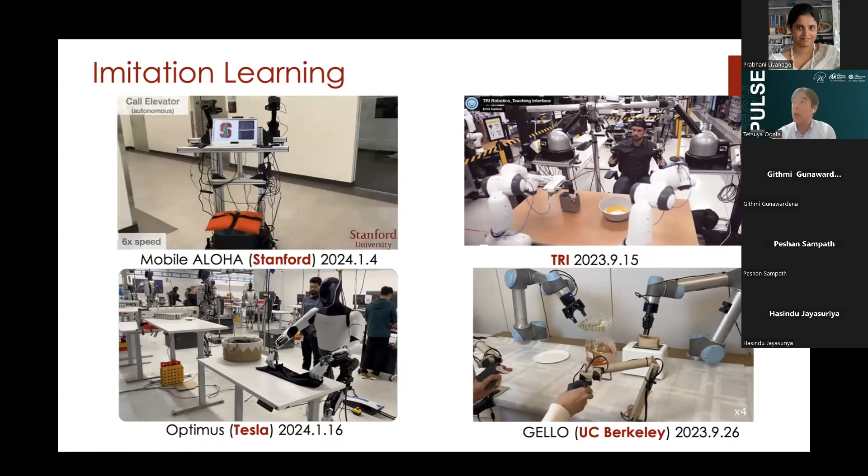Here they use some technology where humans control the robot. By showing such kinds of demonstrations by human operators, the robots are now trained so as to imitate such kinds of motions. And that is one approach.

Considering this, what's interesting now is many big tech companies focus on human-like robot systems, like Tesla Optimus or ALOHA. ALOHA also has two arms, and OpenAI also works on Figure 1 or 1X. They also use and develop humanoid robots. So humanoid robots—because they now try to teach the robot through human demonstration, it might be better for the robot to have a similar shape to humans, so it becomes easier for the operator to teach them different types of tasks.

Considering the history of robotics, going back to this slide, we have the longest history of developing humanoid robots. Waseda University developed the first humanoid robot here, named Waseda Robot, Wabot 1, 50 years ago. My supervisor, Professor Ichiro Kato, started this project, along with his successors.

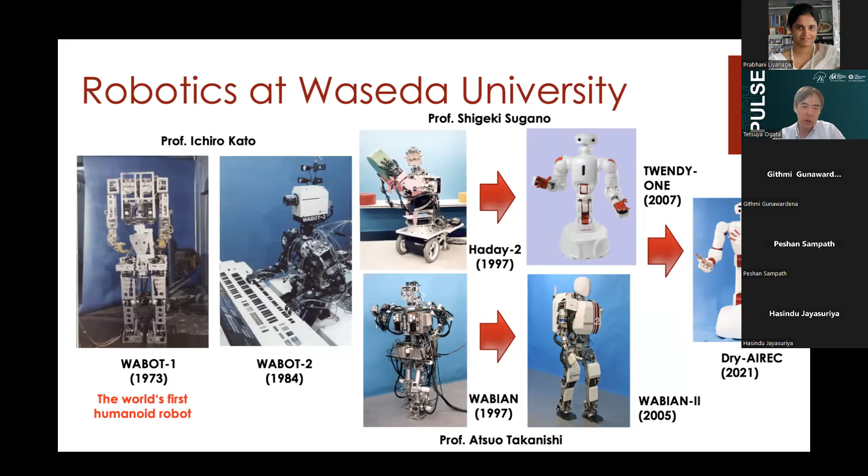I believe that our history supports combining the mechanical engineering field and the AI field. So again, regarding deep learning—deep learning shows very good performance, especially in image handling, sound, and natural language processing.

But at the same time, when we focus on robotics, it's still not so easy to use deep learning for real hardware device applications like robot systems. This is often referred to as Moravec's paradox.

This means some tasks a human adult can do, like playing games, logical thinking, or medical suggestions, are actually easier for AI than some very primitive tasks like walking, watching, or handling objects with fingers or an arm. These latter tasks are usually ones human children can do, but physically interacting with the real world is very open-ended and very hard for robots.

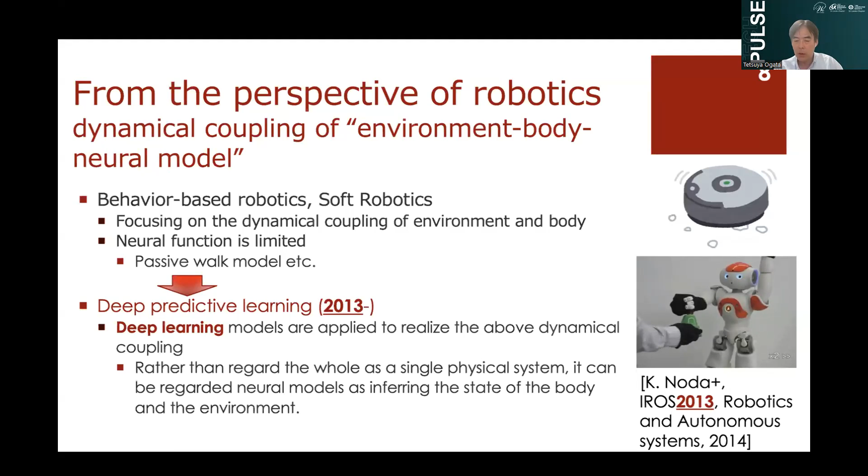And this idea is very related to a latest concept called active inference — inferring actively. So then some experience, some kind of multimodal data, is given not passively but actively, by generating motion, multimodal experience can be obtained.

This kind of idea is now being seen — last year I had a keynote at the international workshop on active inference. But here, attendees came from many different fields, just not from robotics. That is very interesting.

And it changes the posterior beliefs, by changing the cognitive states and also the weights of the model through learning. And this also includes changing its own actions. This concept is very important.

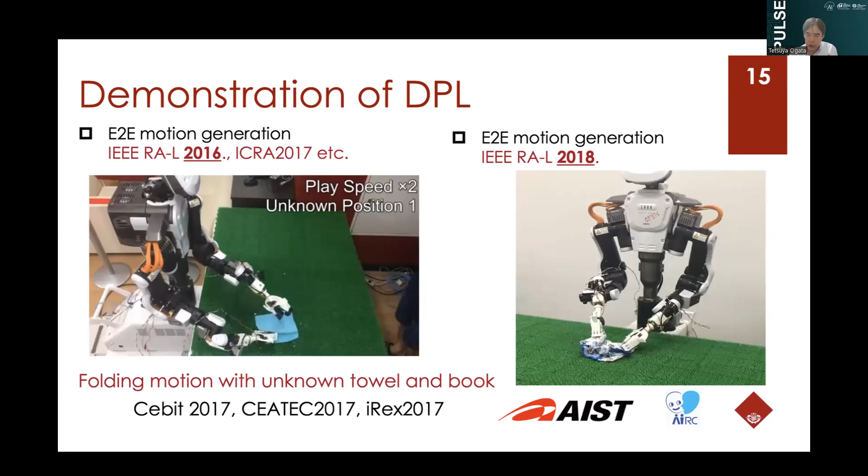And here is an advanced version we can apply. Sometimes, of course, the model itself becomes a little bit complex, but basically with the same policy, we can enable the robot to handle this kind of small cloths.

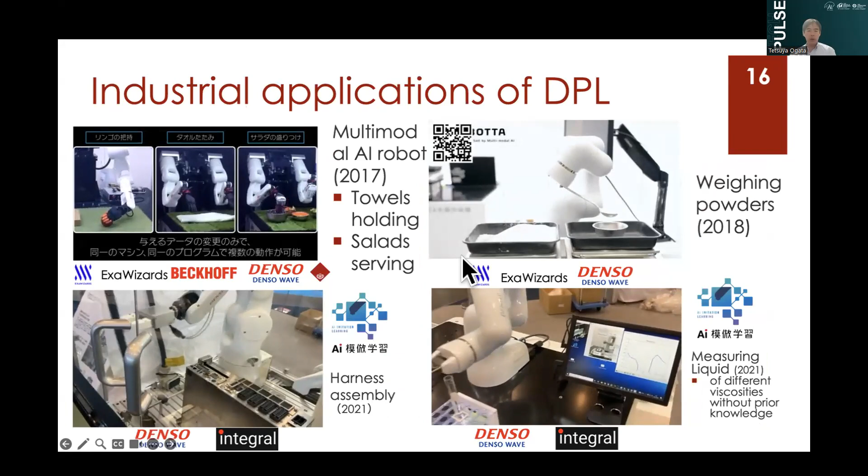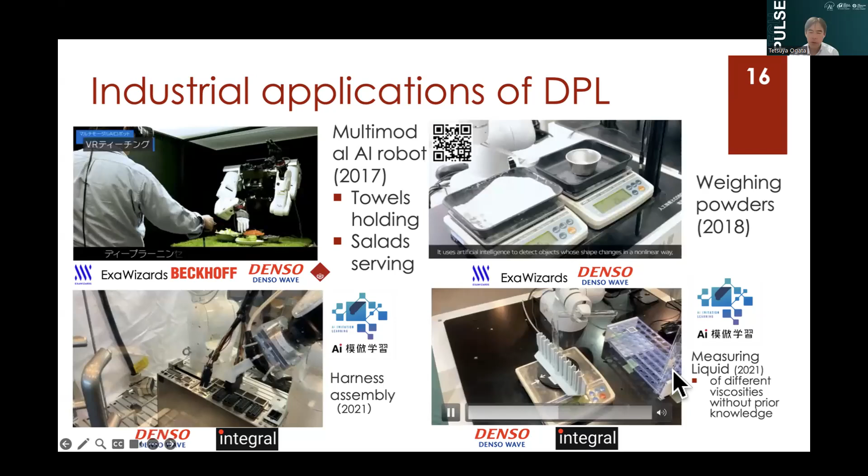And then we showed these demonstrations in multiple exhibitions in Japan, and also sometimes in Germany. Some of the companies showed interest in our technologies. We exhibited these robot demonstrations in multiple exhibitions. Also, some of them, you can see here is a logo of the products of a Japanese company. So some of the technology has already been released to some industrial lines.

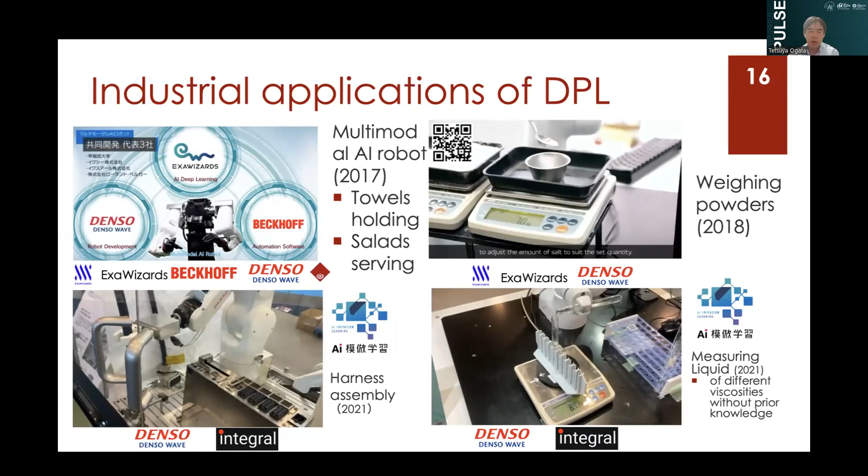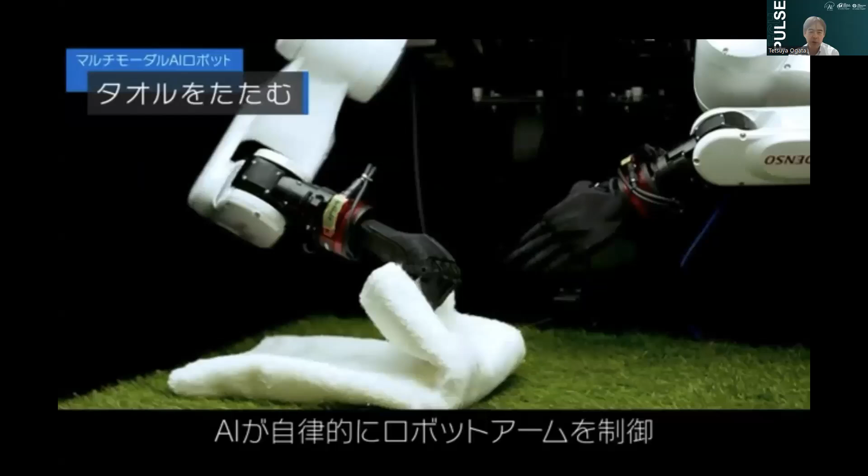And especially there's interest in this story, which is written in Japanese, but it's about a multimodal AI robot. This is a very fast prototype, showing collaboration with Japanese companies. So they first replicated our first work on holding towels, but in a more complex way.

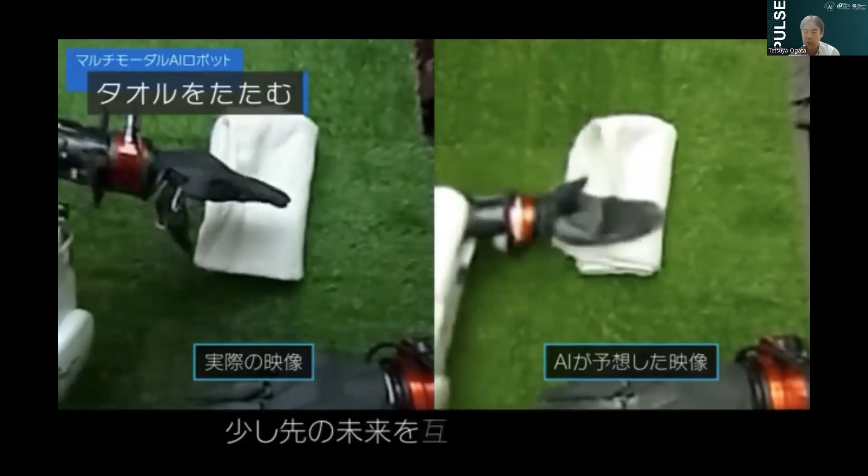This is now generated. So here is a real image, and this is a predicted image. You can see it shows almost the same performance as recent generative AI. So it's always keeping the generated image in real time.

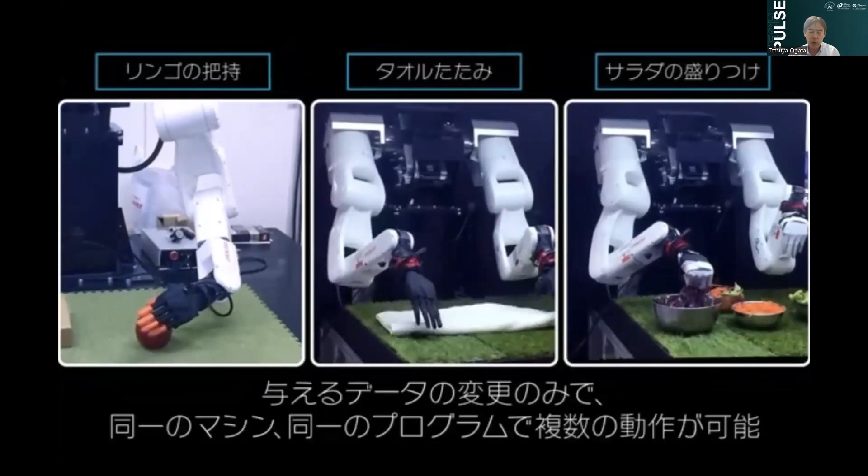And so without any procedural programs, any programs, a robot can adapt to changes in the condition of the target object, automatically adapt, and continue the work. And just by changing the training data, the same robot can work on a different type of task.

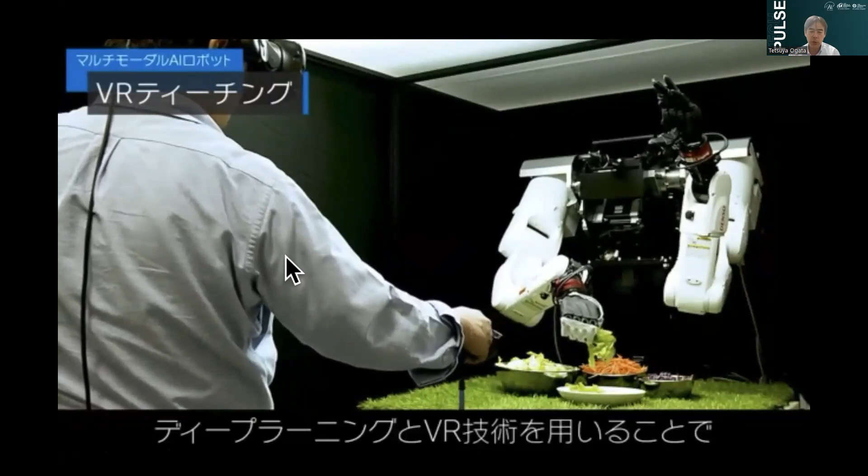Here is picking the salad. For teaching the ways, we use virtual reality models. Now he shows a demonstration to the robot, then the robot can recognize an object or something.

And one of the important topics here is that now the robot has torque sensors in the wrist. So the target of the prediction is not only the image, it's also trying to predict the torque of the wrist.

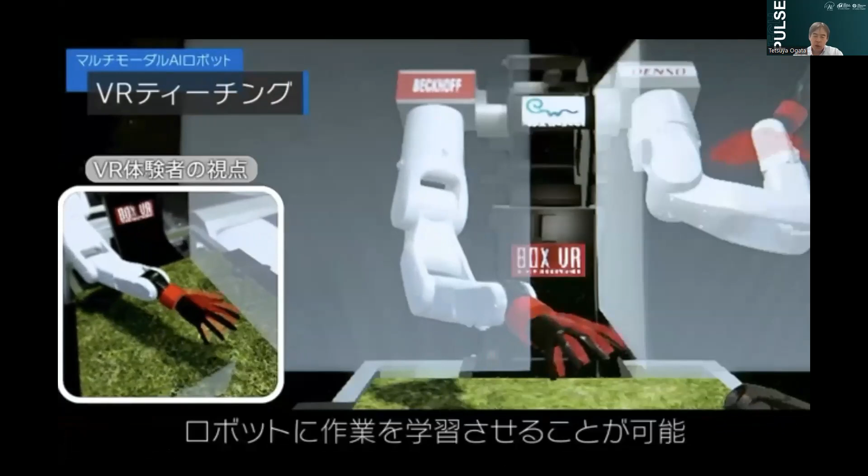It's very helpful, especially for picking salad, because from the robot camera there often happens occlusion. So the robot cannot recognize if the salad is really grabbed or not.

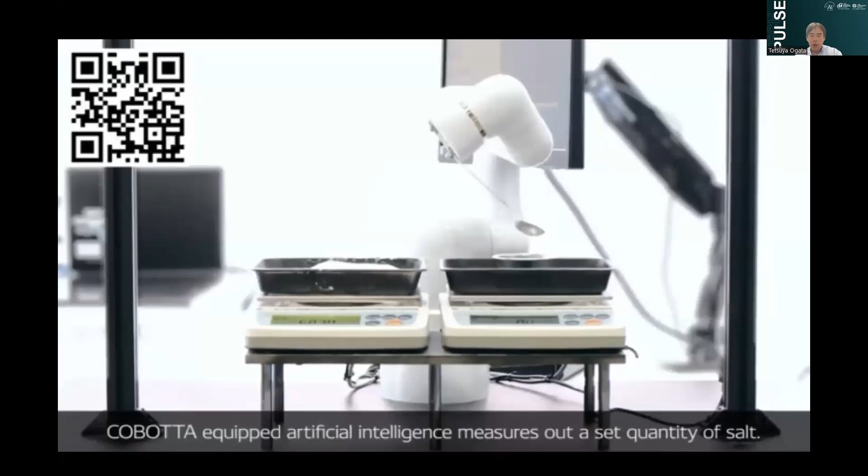By combining the image and the torque of each joint, it can measure the powder very precisely. This motion is also demonstrated by humans.

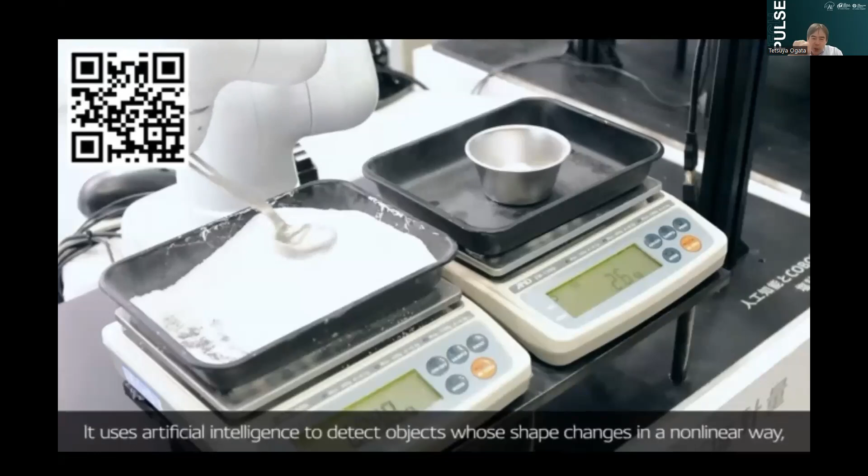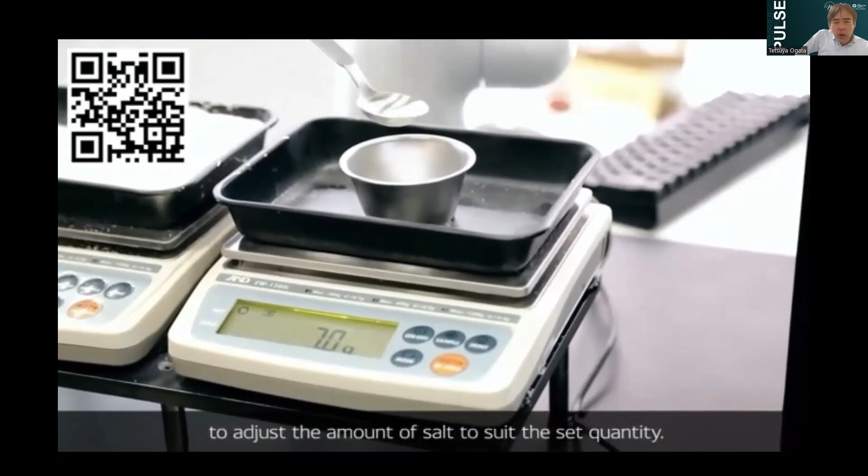It can show small motions to control the weight of the powders. So here's why this becomes an application - considering the development process of medicine or cosmetics, some of this kind of medicine powder is very expensive and sometimes very dangerous.

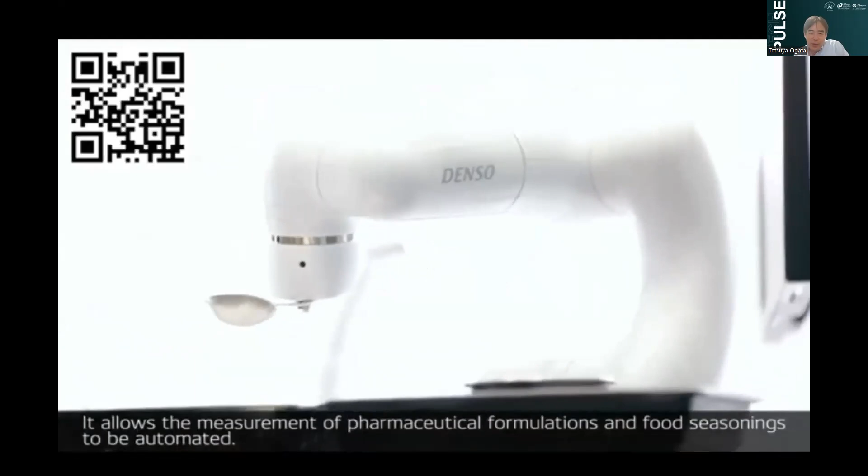Humans usually operate this kind of work, but it can become toxic, so it's not a safe task. So now many industrial companies use a robot for such a development line.

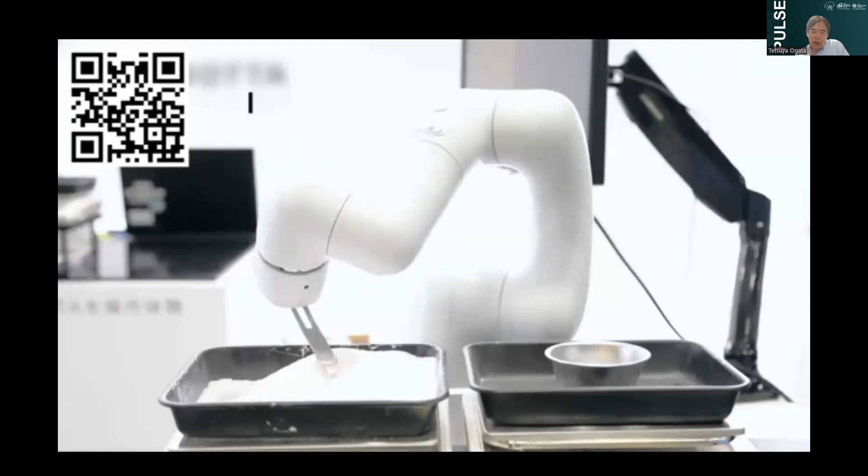The same thing applies to measuring liquid - it's also used for such kinds of medicine or cosmetic industrial experiments. Some company staff tried to test the ability of our robot.

It was just trained on two different types of liquid, but they confirmed whether it could really measure other types of material, like beads, rice, or pancake mix. So firstly, to shake it.

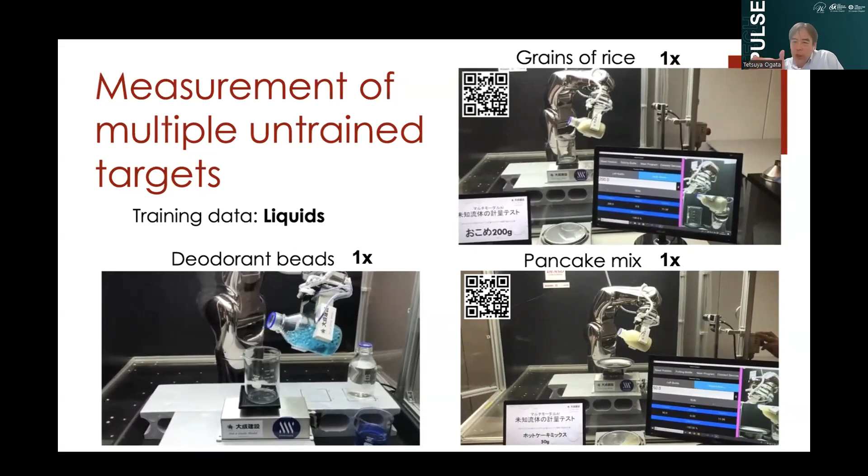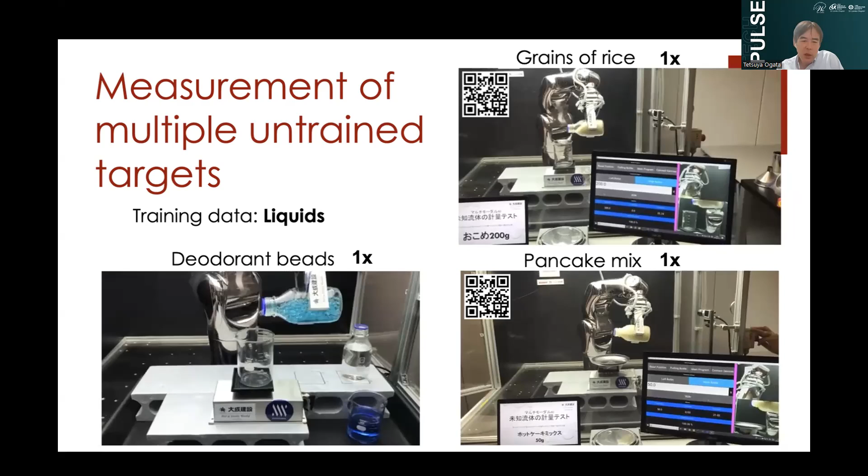By capturing the image during the shaking, it also helps to recognize the size of the amount of liquid, and also viscosity could be estimated.

And here, which one is the first three? Did I forget?

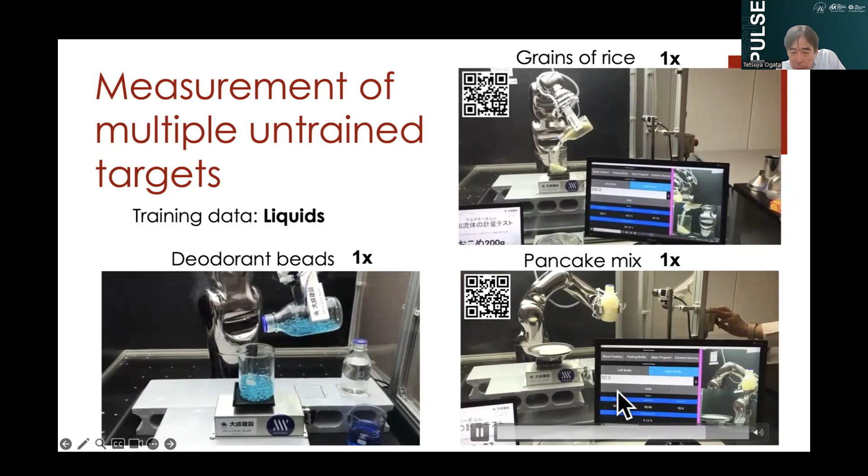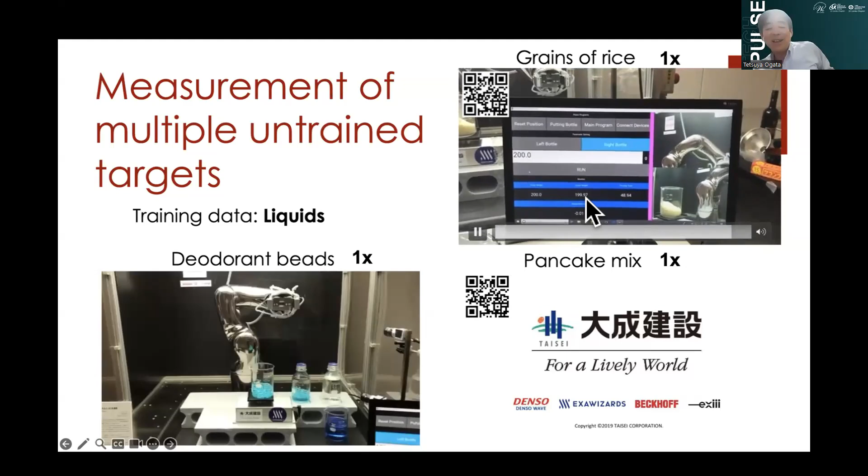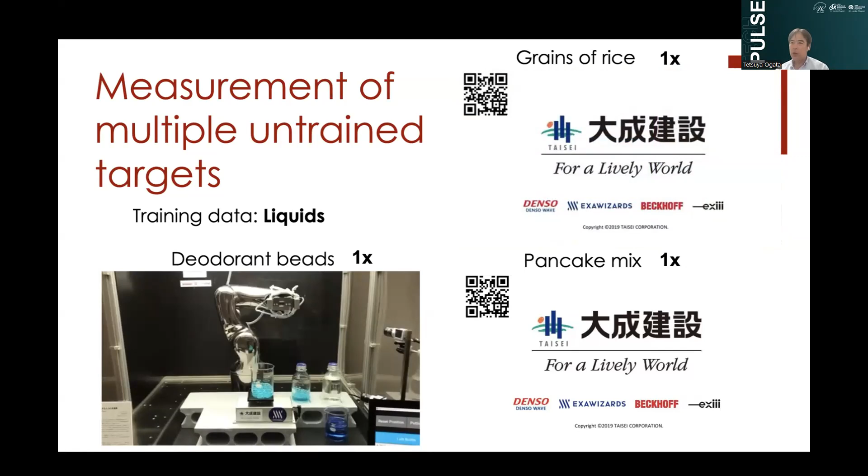This kind of work is done using only deep learning. All control, so joint control, is generated directly from the sensor input. That is very important. And this was already released as another product by Denso Wave three years ago.

I'd like to show, from now, not the detail of the technology, but some applications. Here is work also on measuring or pouring these kinds of materials and ingredients. It won the Best Paper Award in Cognitive Robotics at ICRA.

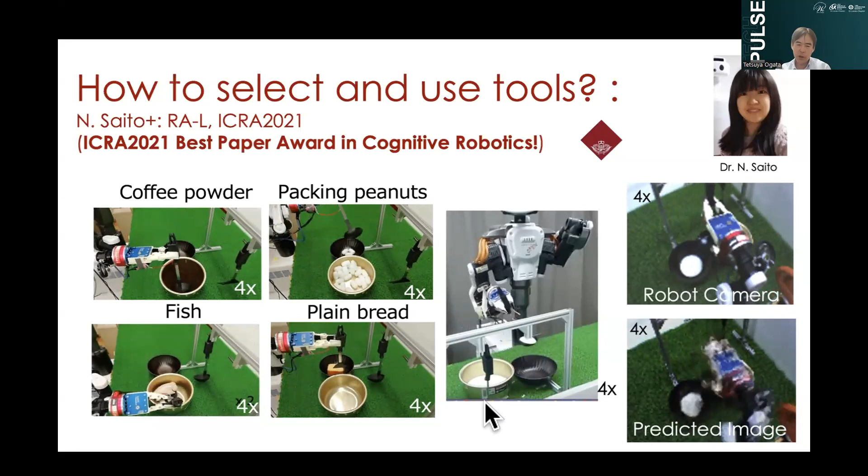The architecture is very similar - it inputs the image, and it also includes the motor angle and the torque sensor, force sensor implemented in the hand. This also becomes the target of the prediction.

So the network is trained to predict the future image. As you see, it's a very similar architecture to the recent latest generative AI idea, but we proposed this framework much before generative AI.

The robot network is trained using this object, and we tested it on this kind of untrained object here.

After training, we can analyze the latent space of the neural networks. It's not always promised that we can find this kind of representation in the neural networks, but in this case we successfully found some very interesting representation.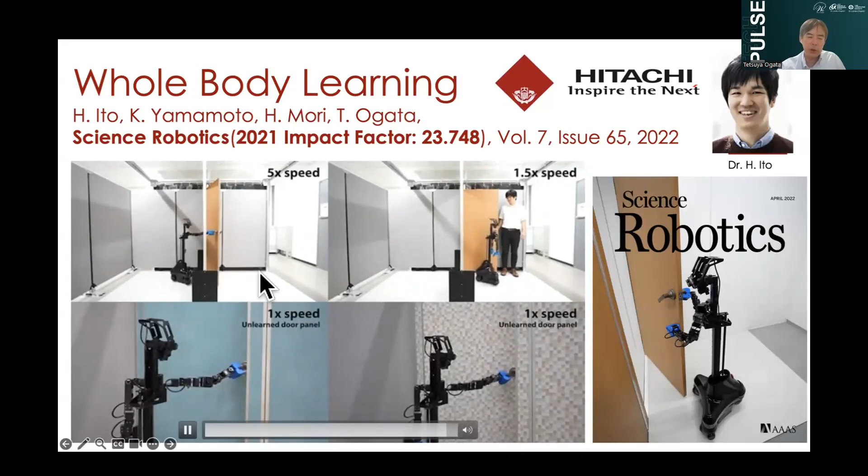So this is using the manner of the mixture of experts. So multiple predictors in parallel try to predict the future conditions, and one of them handles the whole body controls, something like this.

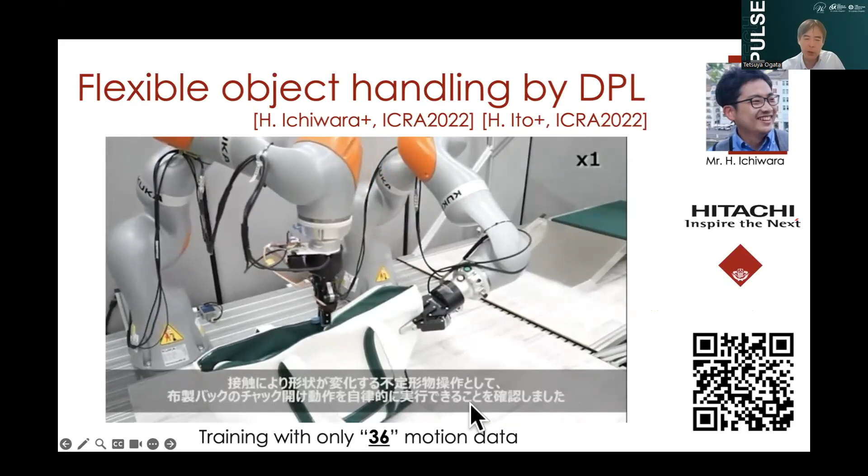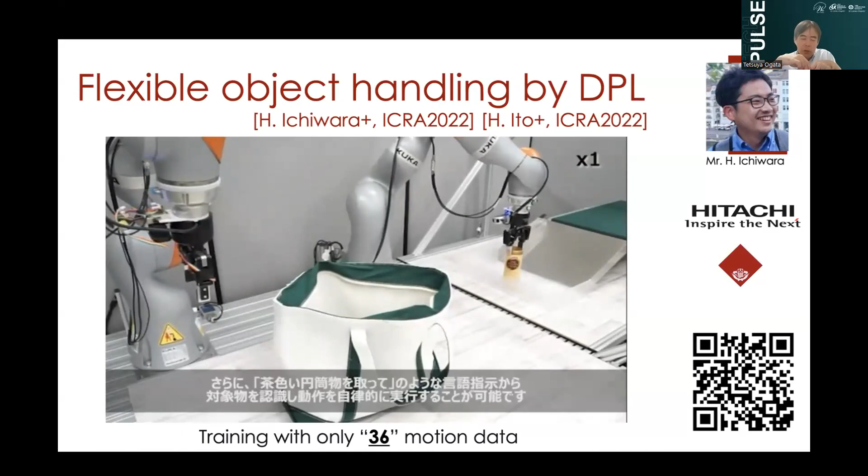The other example I'd like to show is opening a zipper. Opening a zipper seems easy, especially for human children, but for a robot system it's not so easy. I believe completely automatic zipper opening is still a very hard problem for conventional robot systems, because it requires not just adapting to force, but changing the trajectory according to conditions. Especially in this case, we started opening the zipper from picking the zipper part, which means the gripper's grasping condition always changes, so the robot needs to adjust to that kind of change.

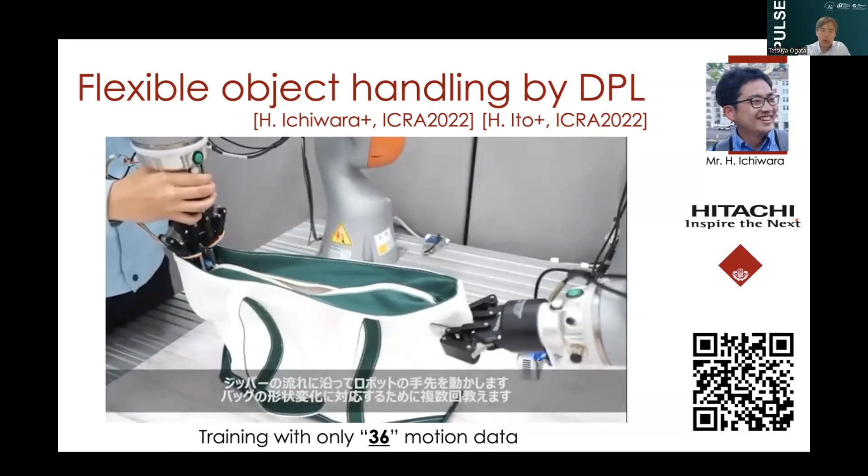The teaching is done like this. Here we used only 36 motion data examples. Then it can open the zipper even on different types of bag.

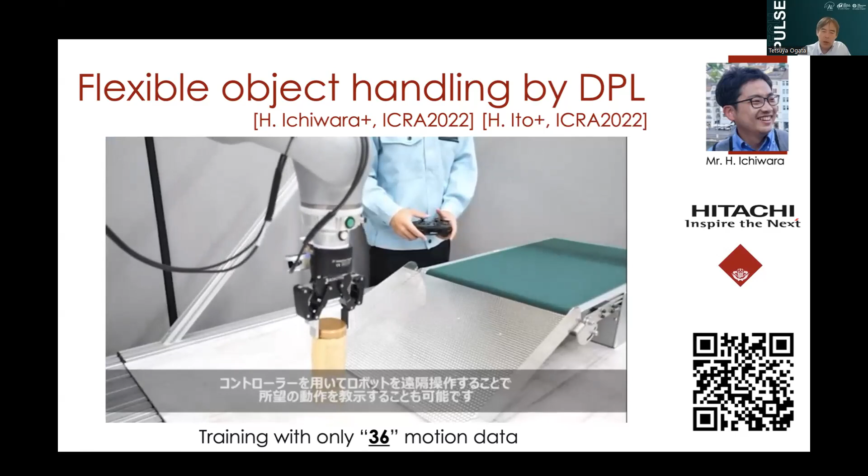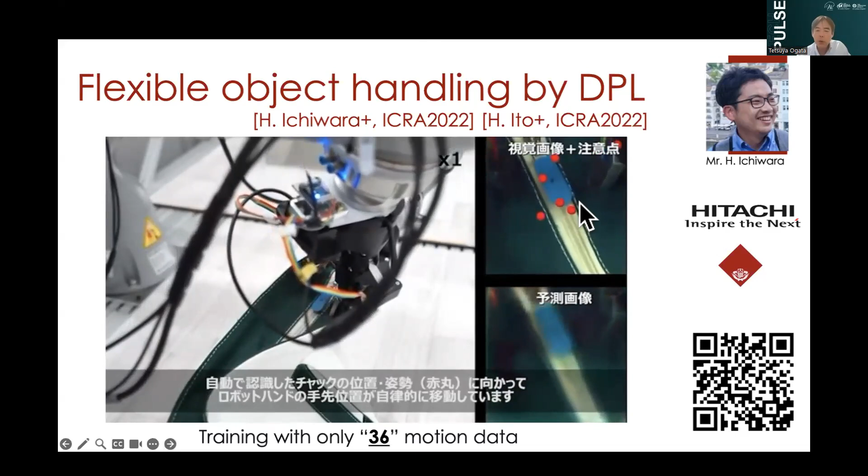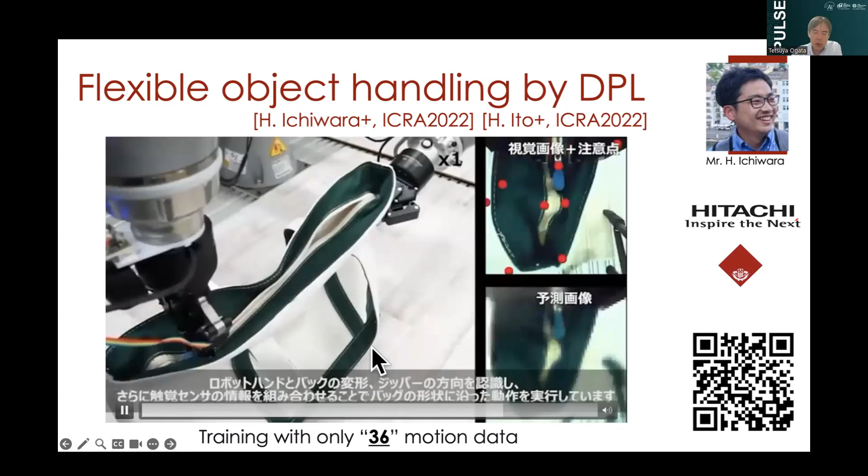We added here a new mechanism of attention. During the prediction of the future, we added networks to ignore the unimportant parts. So we placed restrictions on the predictable version, giving the networks a constraint. They need to select which part can be predicted to reduce the whole image prediction error. Here you can see this red point is automatically trained, automatically emerging as a result of the training.

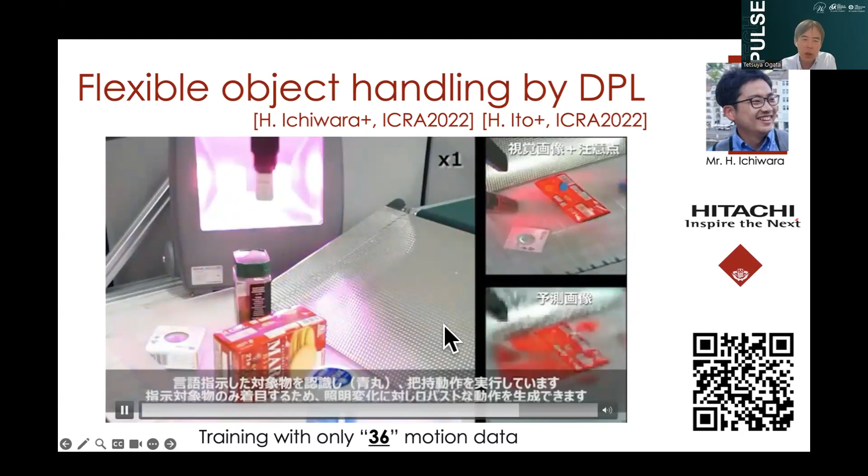Thanks to these functions, we can easily change the background color and environment conditions. We can add many objects, different objects, and change the color condition or lighting condition, but it easily adapts to such changes of the environment.

Here you can see, I like this scenario. It shows the robot can adapt to changes of position, but here I'd like to point out the attention. We give the target object using language, and the robot recognizes this one. In the predicted image, only the target object is predicted, and the other object is completely ignored. That is very important.

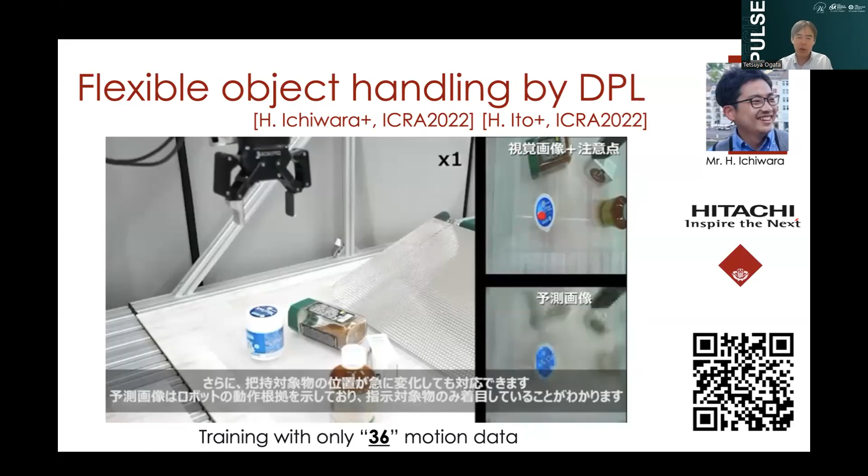So predicting the future image perfectly is not needed. Also, if the robot tries to recognize everything, many things, that becomes a worse effect on completing the task. We can focus, meaning we can ignore the others. That's very important, maybe more than the lack of sensors, in the latest deep learning models. For conducting tasks in the real world, this kind of attention is very, very important.

Again, here the target is predicted for the cognitive state, including the image and tactile senses and motion actions. But here we have restrictions on the predictors, so the predictor has to select which part is important to reduce the whole image error, the whole prediction. That means attention goes to the moving parts, and it also needs to relate them to the actions. There are many parts that dynamically change, but some of them cannot be predicted perfectly, while others can be predicted because they're influenced by the robot's own actions.

As a result, the attention point is mainly focused on the dynamic changes caused by its own motions. That is a very important sense.

Here is another example from our technology published two years ago. The robot was trained to pick an object a little bit far, beyond its arm range. After training, in this untrained condition, the robot recognizes it and removes something like this. Here is very important, that is an attentional point, then it comes from like this.

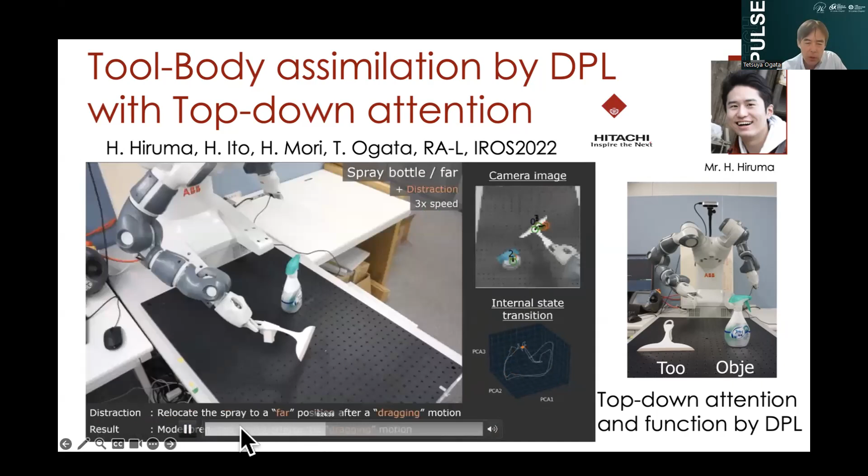I would like to talk about how the attention changes. Firstly, the robot seems to recognize three objects: one is the target object, one is a tool, and one is its own hand. This is just an attentional point that originally doesn't have any meaning. These names are labeled by us, but originally they don't have any meaning.

But the attentional point named 'one' is basically located here. Once it picks the tool, you can see that point one, the gripper path, goes to the head of the object, the tool. There are many ways to interpret this phenomenon, but we can say that our body, the robot body, could be enhanced to the edge of the tool—a kind of tool-body assimilation. This is often observed in monkey brain activities, but the same phenomenon is happening here as a result of training. We don't add any program; we just give the mechanical mechanism of attention and training data, but as a result, this kind of phenomenon is automatically generated.

So this is, I prefer this one. And by adding many objects as noises, it doesn't influence much, but it can use different types of tools or something like this.

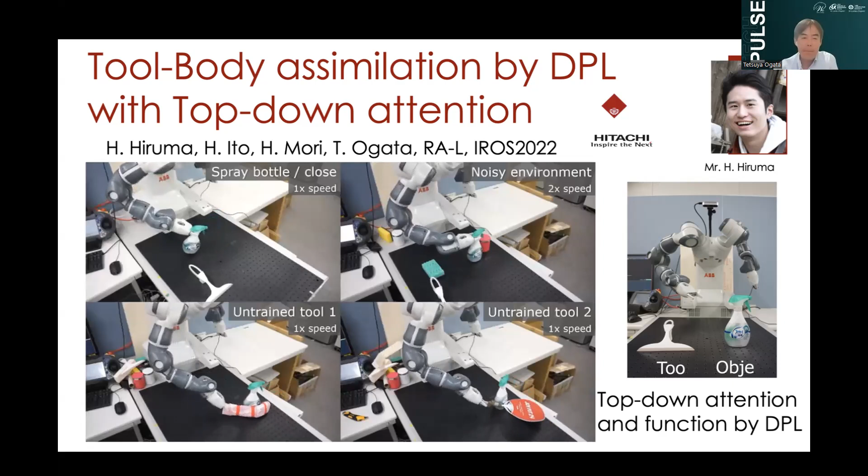So again, back to the original discussion. Many people, of course, take reinforcement learning. Reinforcement learning is, of course, a very important way. One application, especially legged robots, shows quite great performance. But at the same time, we should recognize that optimization is not always promised.

Okay, so model-free or model-based. Sometimes model-based approaches use a very similar concept called world models. The world model is trained to predict future conditions. Once it obtains a perfect world model, the policy is searched, and policy learning is conducted in such learned world models. So optimized actions are only promised under some restrictions, with optimized world models.

We think that we never reach perfect models. We always only have incomplete learning, so there's always a gap between the real world and the models. So the actual motion is always selected to reduce the prediction error. Then this kind of sense automatically generates goal-directed motion. That is our sense. That means we cannot promise that it obtains a perfect model or optimized motion.

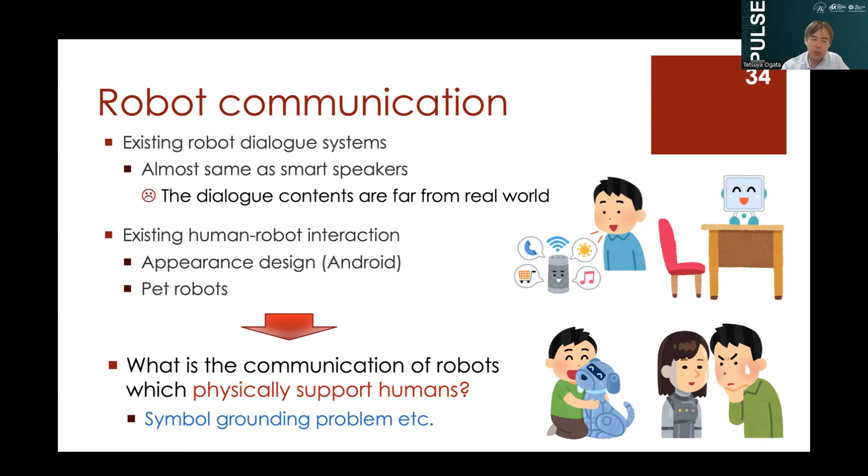So the other target is language. Large language models, of course, show very big performance, I know, but I'd like to say something about that. GPT-4 or something like this: if it's just conversation, this kind of application, large language models now become almost perfect models. But if we think about using that model for real-world applications, we need to think about some problems, like the symbol grounding problems.

For example, this is just an example. There are a huge number of problems considering the gap between the real world and sentences and languages. One is this kind of ambiguity: one motion can be explained with many different types of sentences, like touch the one, touch the orange, touch the one in front, hand on that fruit, something like this. But on the other side, one sentence could represent many different types of motion.

And it's okay to explain it using two sentences, like close to the orange and touch it, something like this. There are many variations by combining these two aspects. By using some technology like CLIP, some of this puzzle could actually be solved, but there are still very hard problems.

Here is our old study from over 6 years ago. We introduced almost completely the same idea as CLIP here. Okay, so here are two autoencoders.

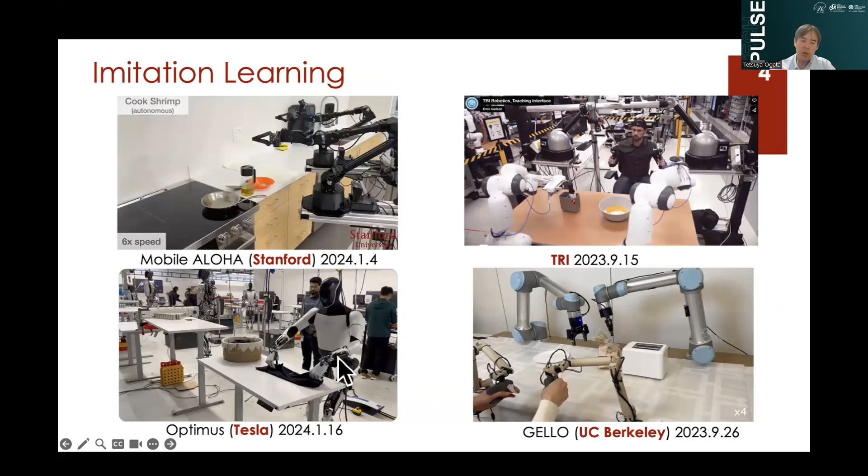Thinking about the history of humanoids, we can believe that a humanoid can do many things, even with one body. And I think from this year, as you see, there's OpenAI, Tesla, and other big techs seeming to think about the same thing. Optimus can do many tasks, and 1X Neo can work on many different tasks. So this kind of idea now becomes common sense in the world.

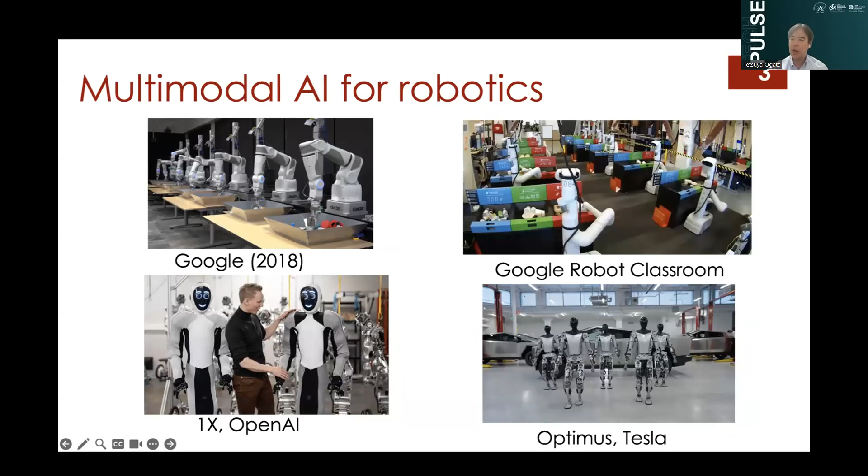Of course, it's kind of a dream, especially in Japan. We had the experience of developing Asimo 20 years ago. At that time, Asimo and other types of humanoids were developed at many different companies. But finally, almost all of them failed to make a market for the humanoid robot. So in Japan, it became very hard to propose this kind of project.

But now, from this year, the United States and China have had quite a lot of activity developing humanoid robots with AI technologies.

Here is our latest version of the humanoid robot. The name is AIREC, which comes from 'AI-driven Robot for Embrace and Care.' It's a little bit of a strange name, but anyway, we expect this robot can work in many different scenarios for supporting human daily life.

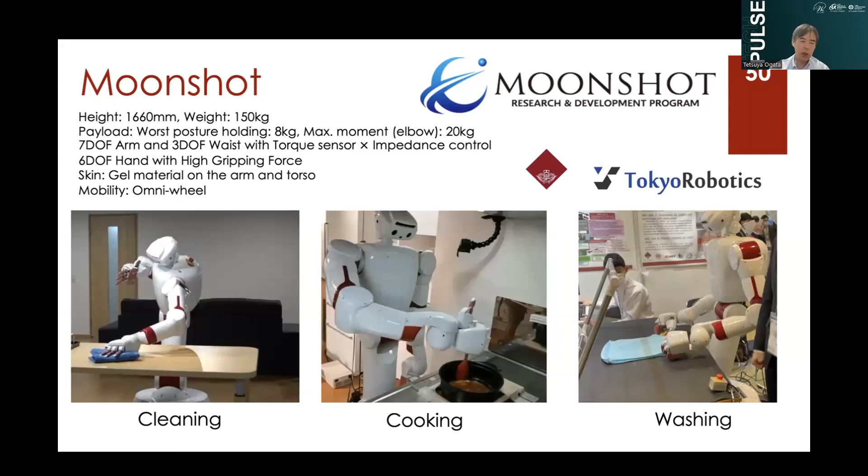It can generate big power - even using one arm, it can lift over 20 kilograms. At the same time, it has a torque sensor on all joints, so it can generate very smooth motions like this. Here we don't use any AI - we just input the impedance with the Z direction axis to keep it the same, something like this.

Here is one of our latest results on cooking. Saito-san proposed this project - she is the first author on pouring food. It won the best paper award at ICRA, and she continued the work on cooking.

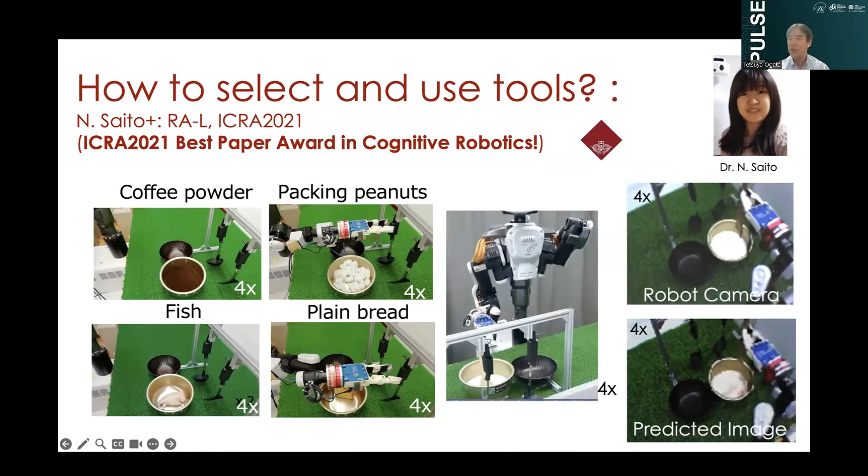For scrambled egg, at first I thought it would be easy - just moving with random motion. But if you do that, the result becomes like this. It's not so good.

So in this case, she taught the robot using direct teaching, since she cannot explain in detail what she's doing - meaning she cannot program it directly. By teaching it 32 times, the robot acquires her skills and automatically changes its motion according to the condition of the egg, which is gradually changing during heating. Then the robot needs to change its manner.

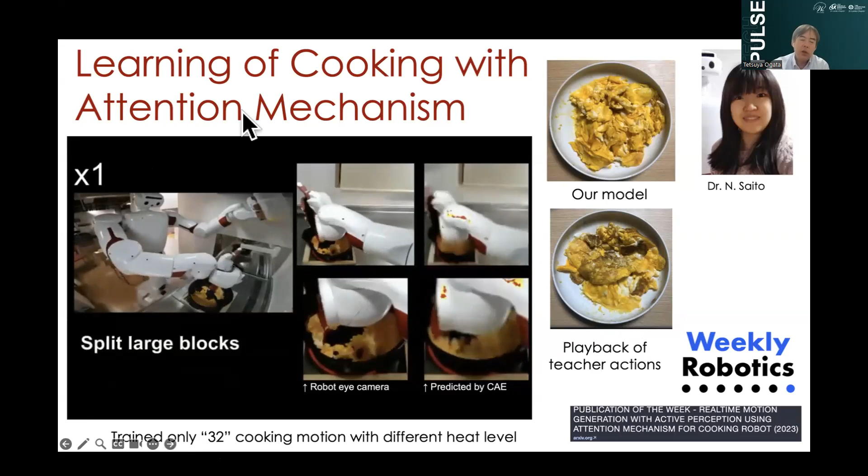We also use attention - not just for vision. This attention can select each modality. The first condition is mainly focused on vision, but during cooking, attention moves to the tactile senses. That's very interesting, and we've now submitted this paper.

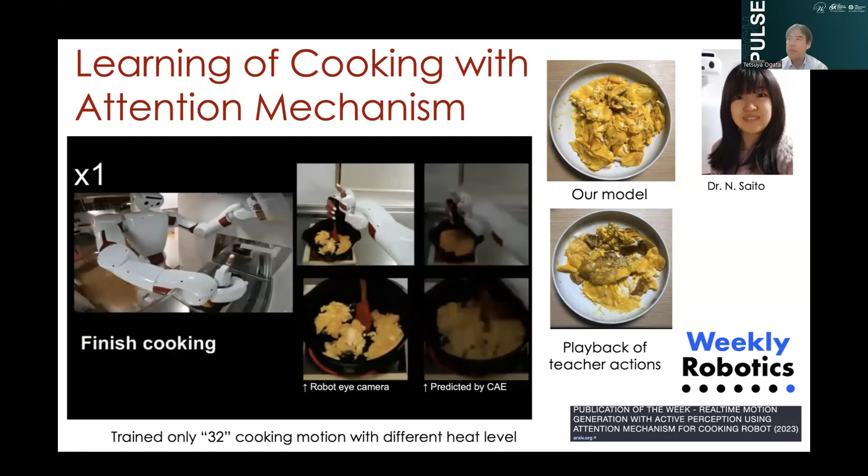So here is our open source software for deep predictive learning - we call it not deep reinforcement learning, but deep predictive learning. It's one way to apply imitation learning, with a simple attention mechanism also implemented. So you can try it - if you're interested, please capture this image now.

Here is one of the latest demonstrations of picking objects with sensors - you can see that even when changing the lighting condition or adding human hand noise, the robot can consistently continue the motions.

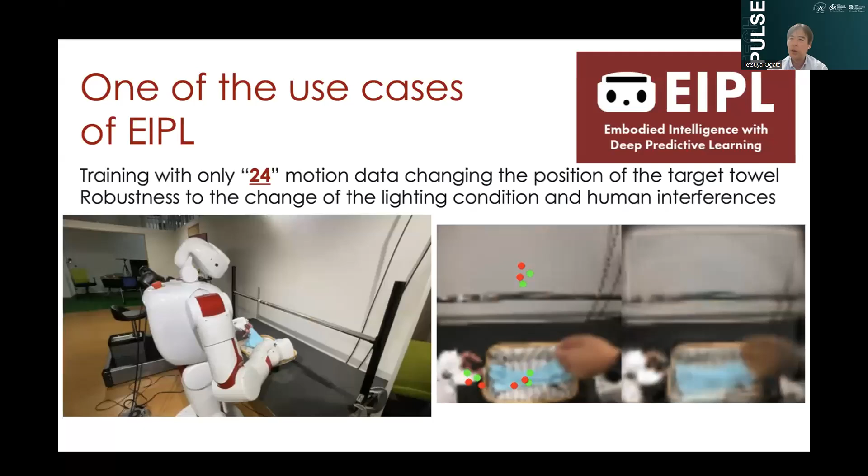And here is a demonstration from an exhibition last December at Tokyo Big Sight. Here is a minister - a former minister came to visit and we showed our demonstrations.

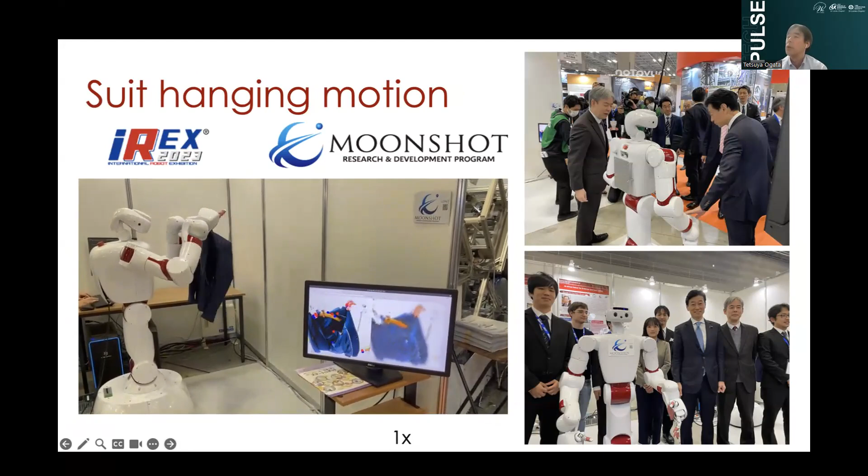So I think there are some stories about how robots and AI have co-evolved. Co-evolved means that now, interestingly, many companies have restarted developing humanoid robots. Humanoid robots were developed starting 50 years ago, and over 20 years ago there was a boom in Japan for humanoid robots, but it always failed because we could develop biped walking, arms and fingers, but there was no way to control the whole body.

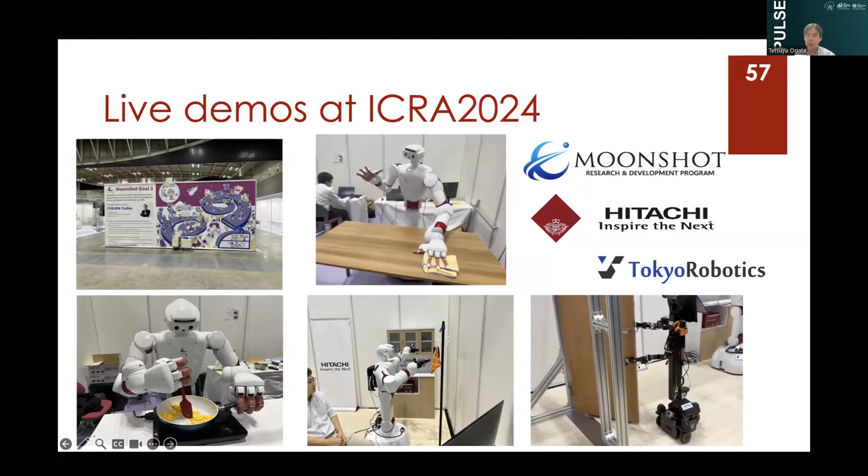Here is one demonstration: handling laundry, picking it up. Here we used only 16 demonstration data points, which is actually too small, so the demonstration itself was not so stable at this time. But basically we can see the success cases, and it was captured by many media outlets in Japan.

Interestingly, this was developed in only 2 weeks. But actually it also includes work to move to this container and pick up the dish - that's the whole story, but it takes a little bit longer, so here we just show these motions.

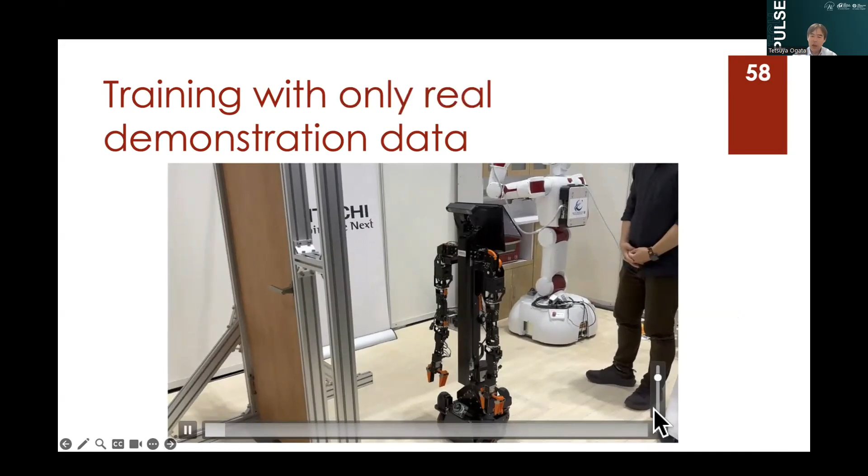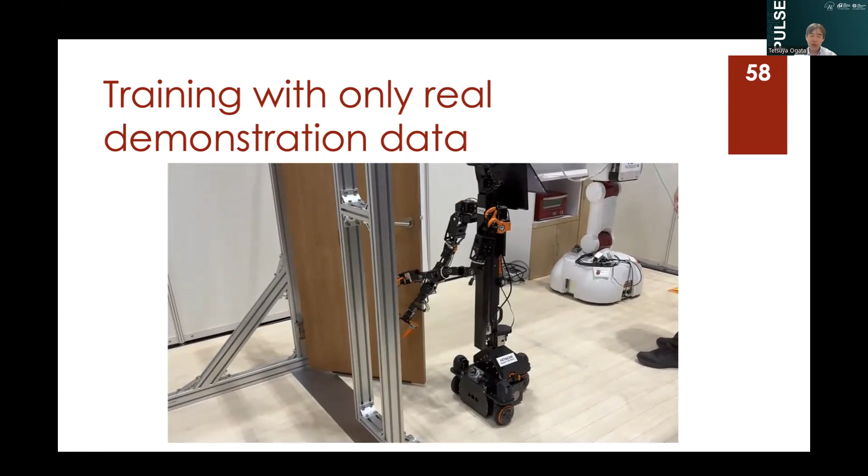And this robot is basically very expensive - very, very expensive. So now I'm collaborating with Hitachi to develop the latest version for the Moonshot project. So you see this door-opening robot - and it's not just for door opening, it can of course be used for many different types of applications. This version is much, much cheaper than the original robot, and it can be trained very easily. By the end of this month, I expect it will be released for research purposes or more general use.

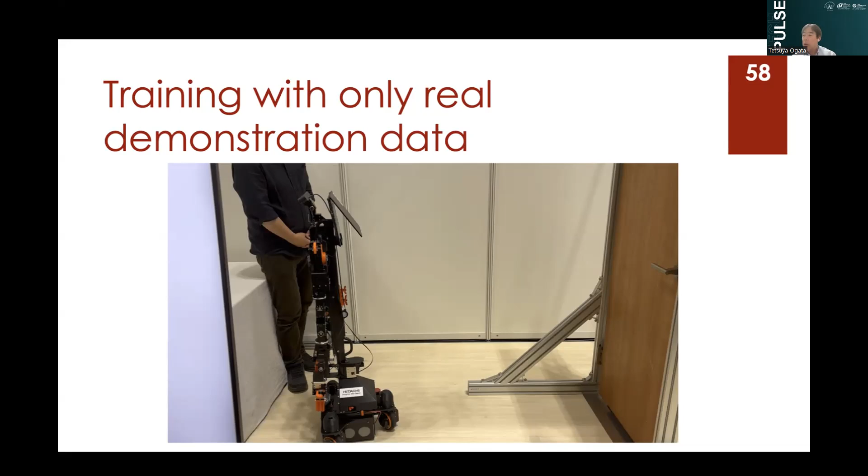Okay, still have some time. This is another example. Some of you may feel that this kind of robot is very slow, but here we show that this kind of robot can move very quickly. We collected just 3 motion data samples in the real world.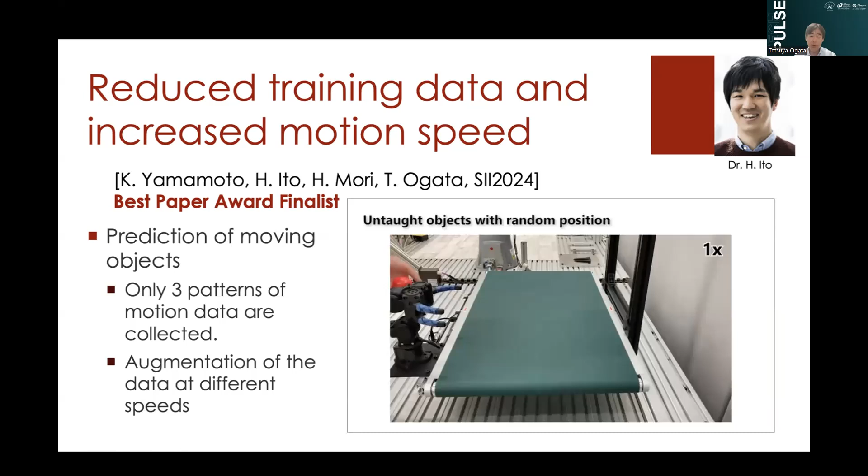That data is augmented not in a simulator, but in the data space itself. We can generate different types of speed, then the robot can adapt to different types of objects, different types of motion, and different types of trajectory. For example, this one just enjoys it - it's almost like a pet, but yes, this is trained very easily, and it was a best paper award finalist at the IEEE conference.

And here is the last video. This is collaboration work with JAXA, the Japan Aerospace Exploration Agency. Our application is now enhanced to the space stations, where the robot is expected to support astronauts. During their rest or sleeping time, the robot is expected to prepare experimental settings, or sometimes gather such devices into the bag. Here you can see we use the technique of opening a zipper.

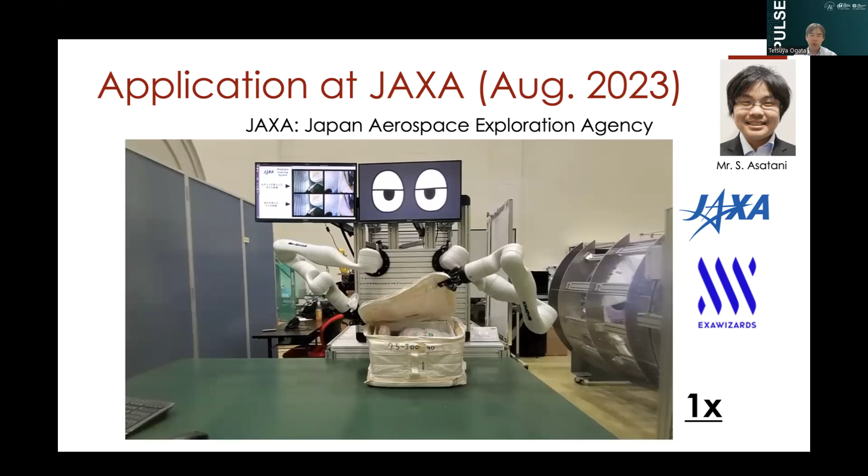At first, we just tried to control the robot by using teleoperation, but due to the gaps there are time delays, so it's almost impossible. So now, he is a researcher at ExaWizards, one of the startup companies, and I am now technical advisor of this company. Then they try to collaborate with JAXA for supporting this kind of activity in the space stations.

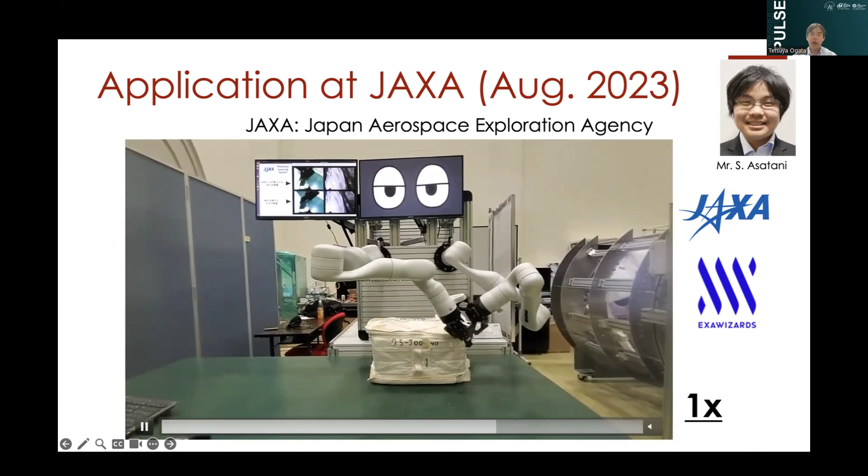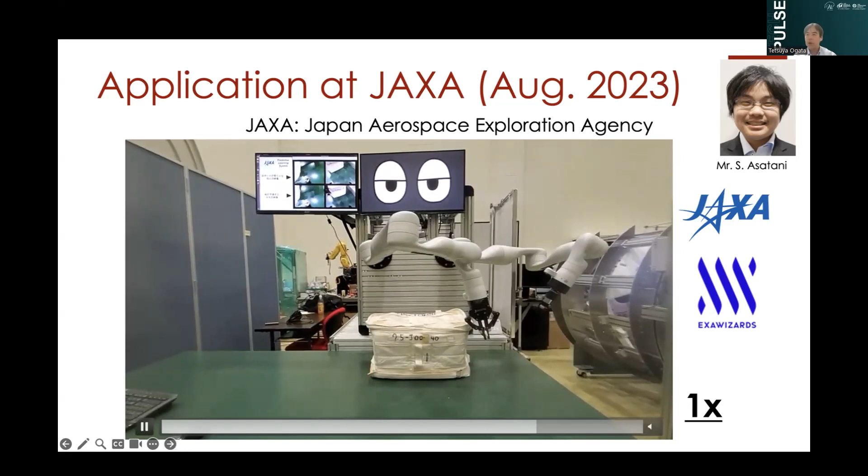Okay, I think it's almost 90 minutes now, so sorry for just showing many movies without talking about the details. My ideas originally come from topics such as psychological developmental robotics or cognitive robotics. This is preliminary study, and I don't have enough time to explain the details, but this research models human cognitive states in AI and robotics, and that idea is directly used in the application of real robot hardware. That's my message. Okay, that's all my talk. Thank you, thank you very much.

Then if you have any questions, please. It's okay, any type of questions, not only related to my talk. Some topics related to any types of AI and robotics, then I can say something.